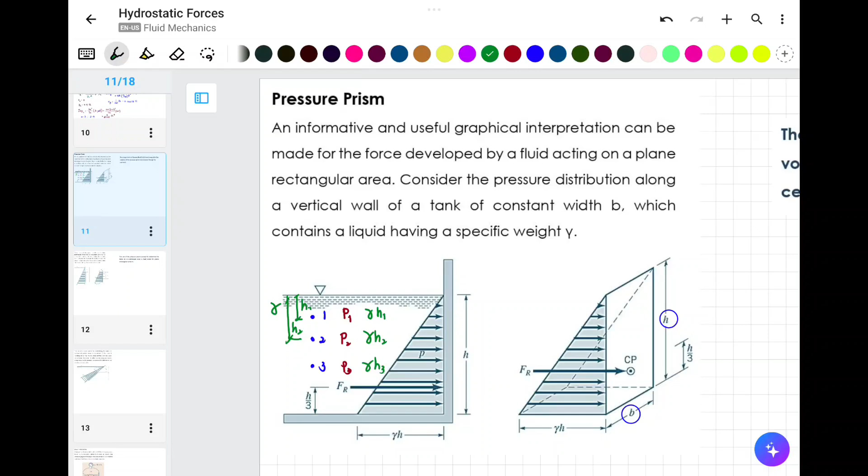So what I'm saying in this illustration is, as our point goes deeper, the pressure increases. In this case, if the specific weight is uniform or constant, then the pressure increases constantly in a linear relationship. You'll notice it forms a triangle. So the lowest point, at a certain height H, has a pressure of gamma H.

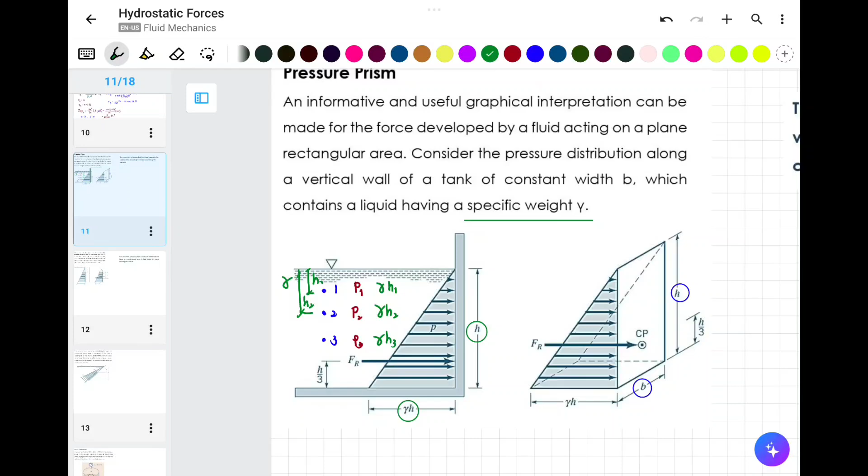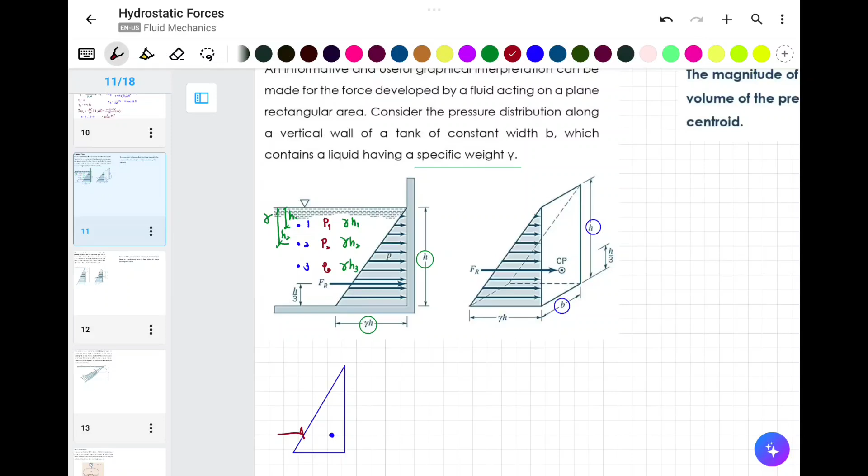Now let's project this onto our rectangular wall, which has an area of base and height. From our statics, or engineering mechanics, if our loading is triangular, we know that the centroid of this loading will act at a certain point. Our force or resultant acts at a height of 1/3.

So it acts at a 1/3 height. Let's say this is it, so 1/3. Let's call this H, so we have a definition. This is B. So 1/3 of the height, that's where our resultant or force acts.

So you see that. In that case, if we want to find the force that acts on the wall, let's see how it becomes. This is our area. We have an area equal to B times H. Therefore, our F sub R, from our discussion earlier, since we have a pressure diagram here.

So for every strip, or every unit length, we have the color here, for every strip of our pressure. So for example, this, every unit, going up and up, until we get our width B. So therefore, this will be equal to the pressure acting times the area, similar to what we discussed earlier.

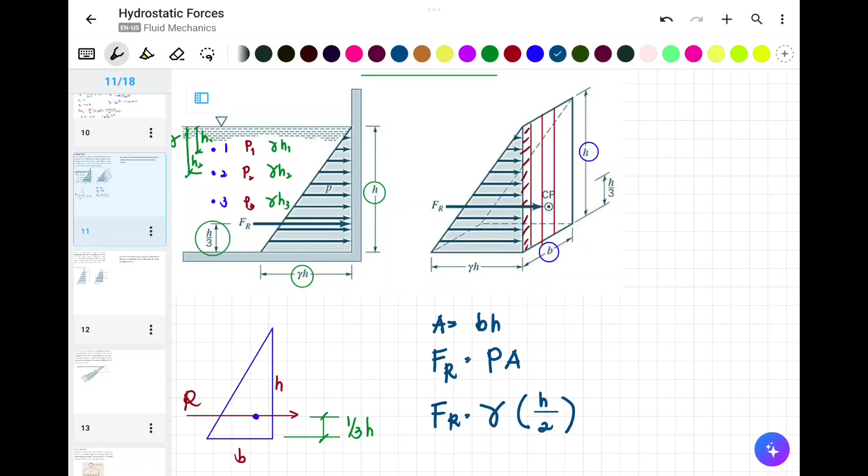At half of our rectangular section. So this will become H over 2 times our area. Since we know that our area is B times H, therefore, simplifying that, gamma multiplied by H over 2, times B times H. So therefore, our force or resultant force is equal to, what happens there, that is 1/2 gamma B H squared.

So there's our area, or should I say force. But if we're going to notice, since we are dealing with a prism, you'll notice that since we are dealing with a prism, when we say prism, what we have in mind is something with width, length, and height. A prism, so we're talking about a three-dimensional object.

When we say prism, meron tayong volume. And that volume, yun yung representation natin ng ating totality na tumatama na force, or should I say pressure distribution. Katulad nito, may volume siya. So meron siyang height, may base, meron siyang width na gamma H.

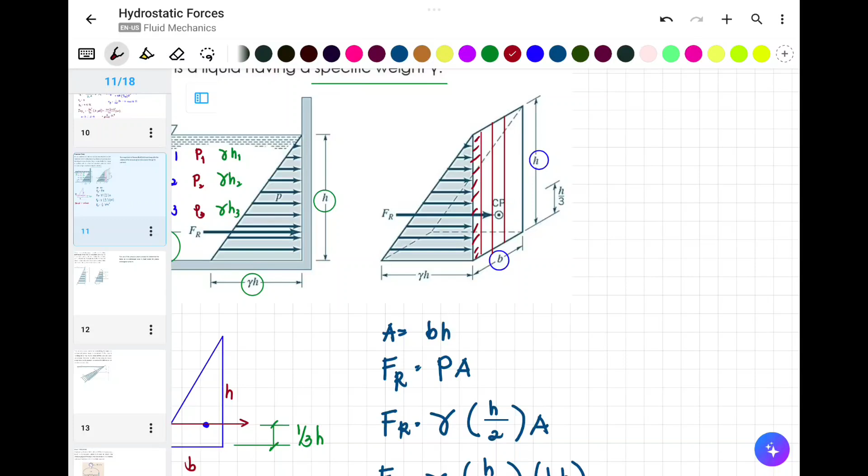Kaya pag kinuha natin etong formula na ito, if we're going to resolve that into a prism, prism approach, pwede natin sabihin that F sub R is equal to yung prism. So that is 1/2, triangle muna. 1/2 that is gamma times H times height na H, times the width na B.

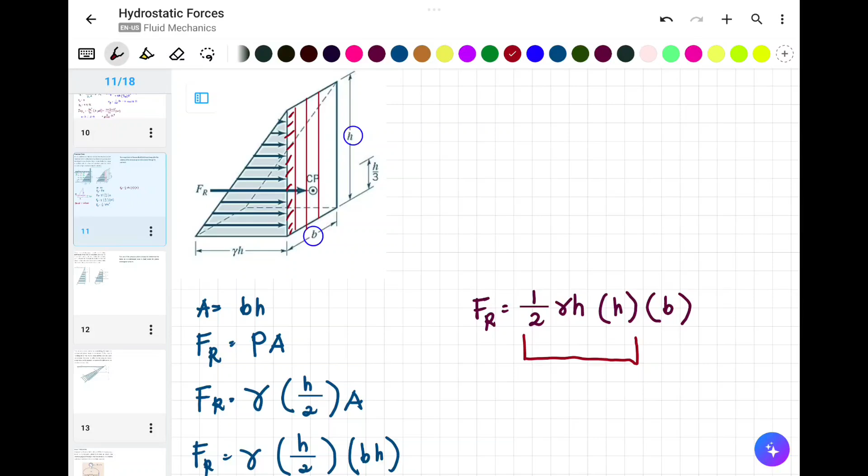So ito yon, kung titignan natin mabuti, ito yung kanyang triangular area. Kasi prism, di ba, so triangular area. So pag say area, para maging volume, kailangan meron kang i-multiply na width. So itong totality na to, this is your volume.

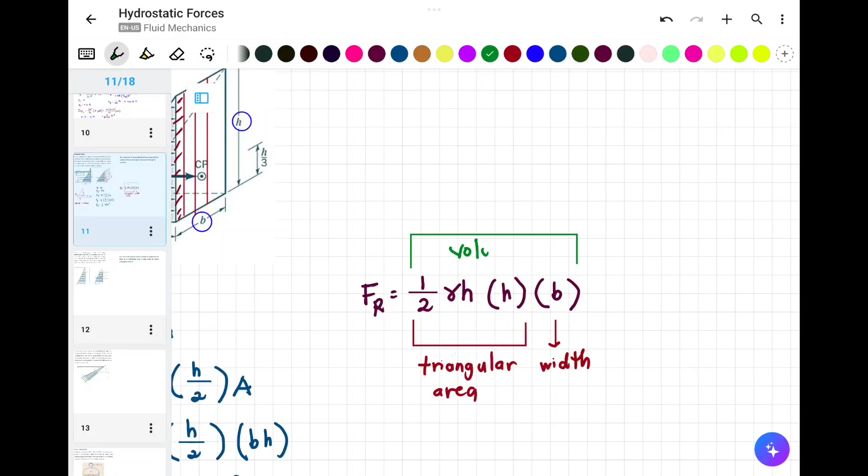This is your volume nung inyong prism. Kaya ang ending, magiging katulad lang din yan nung formula natin. Using yung ating kanina, using yung concept naman natin ng ating pressure from hydrostatic forces na nakasubmerge, that will become 1/2 gamma B H squared.

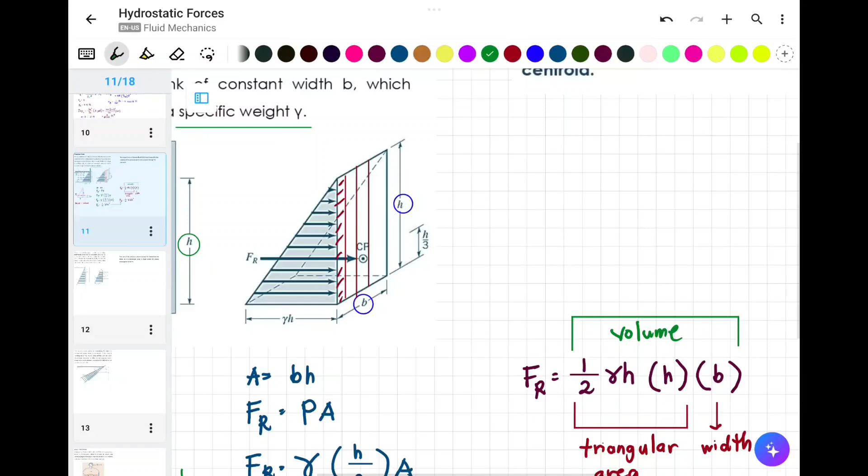Equal lang, parehas na parehas lang yan. Kasi nga ang notion natin is volume. So kaya sabi sa atin dito, the magnitude of the resultant fluid force is equal to the volume of the pressure prism and passes through its centroid. Ito yun, yung pinag-usapan natin. That's the derivation kapag gusto natin gamitan ng triangular prism, yung ating pagkuha ng pressure to a point doon sa ating mga wall or mga nakasubmerged na body.

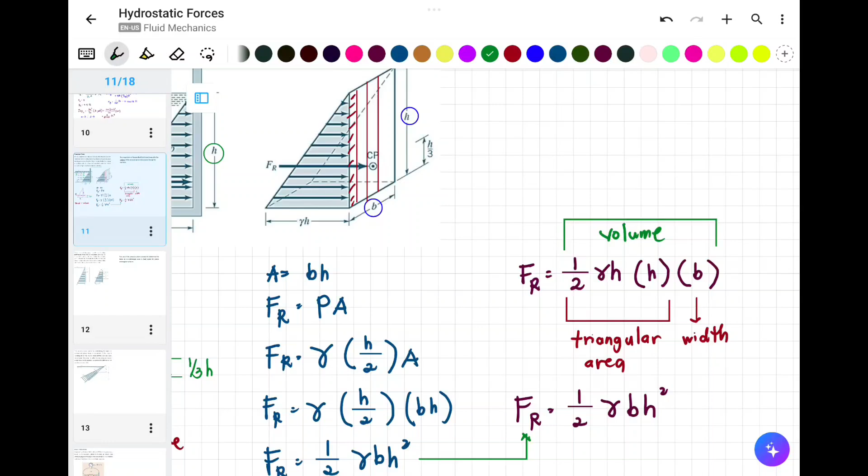Pero alam natin na that force, that force will act saan nga ulit? Sa center of pressure. So this force will still act, it will, this force will pass pa rin through center of pressure.

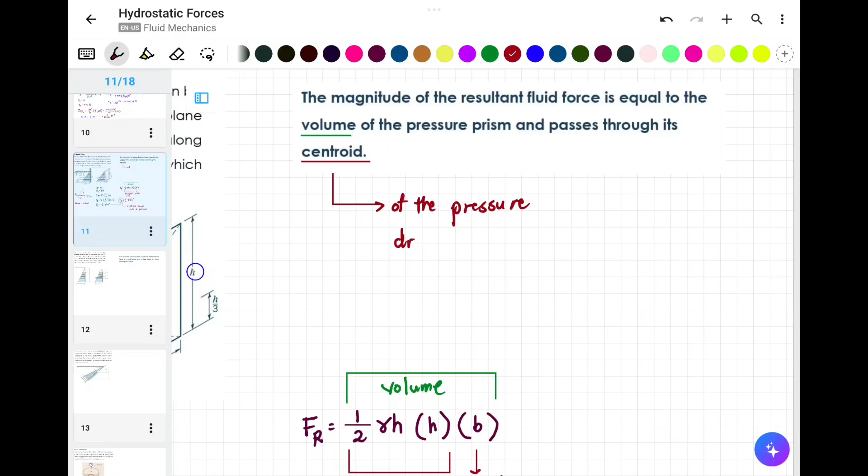So doon pa rin yung tatama. Magpapass sa centroid ng ano? Centroid ng inyong triangular area. Ito yon, yung centroid na sinasabi dito is yung centroid. Baka kasi malito eh, so di ba sabi mo center of pressure? Ito yung centroid of the pressure diagram.

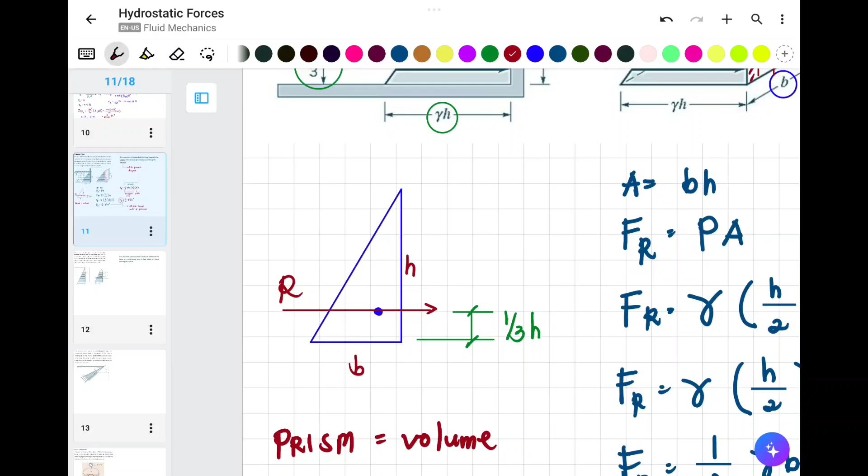So ito yung ating centroid ng pressure diagram wherein, ito siya. Dahil we want to know saan siya tatama, centroid nga siya. Pero kapag pinroject mo na yung inyong body, or wall, into a prism, tatama pa rin siya sa ito. Tumatama pa rin siya sa center of pressure.

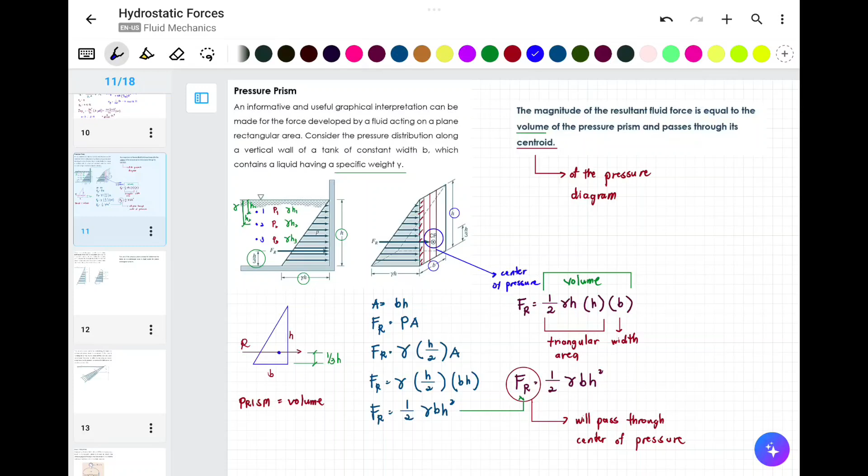Yun yung ating paggamit ng pressure prism. Medyo ginagamitan natin ng concept ng geometry, ng solid mensuration, of our concept kanina yung mga concept ng moments of inertia, centroid, center of gravity, still because we are dealing with figures, prism. So volume is area times a certain height. Ito yon, yung area na yan, yung triangular area times the width, kaya volume.

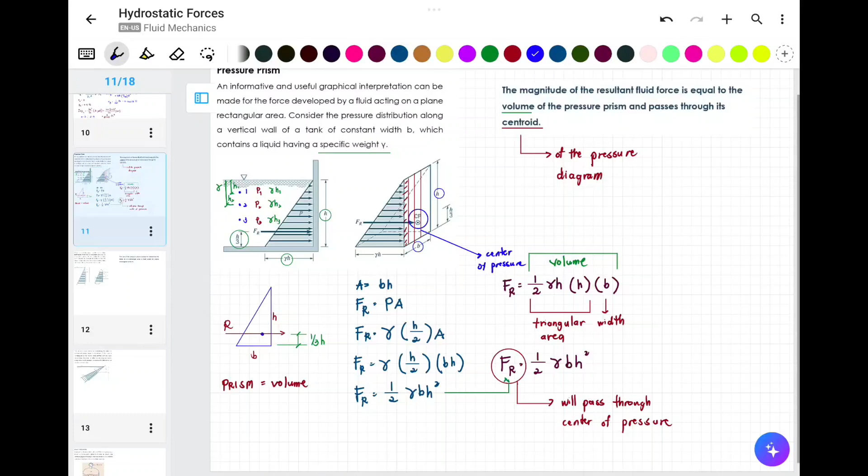Okay, now let's have this one. Sabi dito, the same graphical approach can be used for plane rectangular surfaces that do not extend up to the fluid surface. Ibig sabihin naka-submerge. Unlike kanina, kasi mukhang extended. Ito yon, kaya sinabi niya, ito, extended yung kanyang height. Kaya sagad-sagad, parang total na yung height niya.

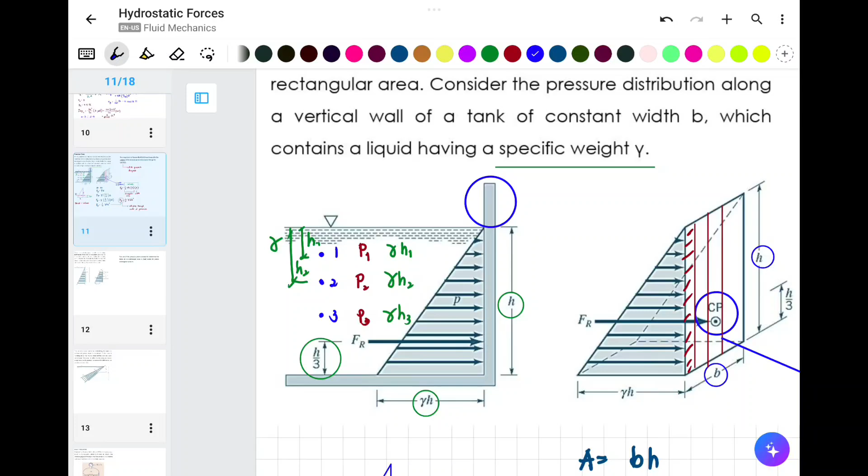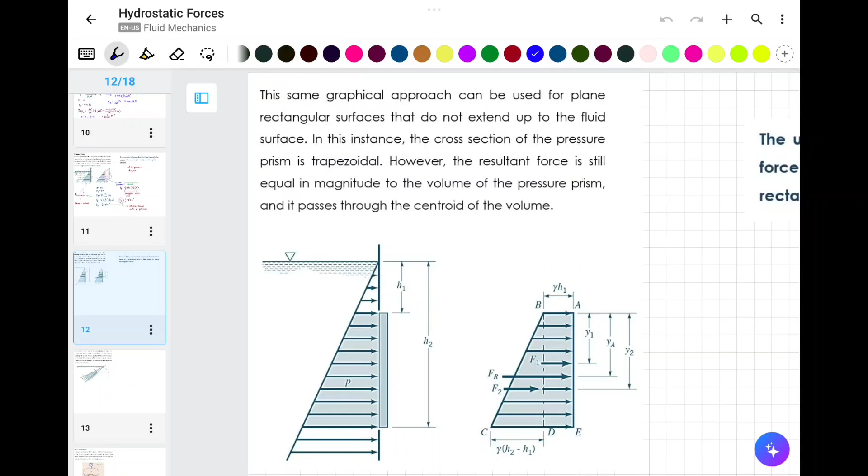So walang factor yung mayroon pang bago umabot dun sa pinakataas ng kanyang section. Walang ganon. So unlike dyan, ito, mukhang hindi ganon ang itsura. Meron pang height, or should I say, meron pang height, no, or nakasubmerge siya to a certain height. So if in this instance, the cross-section of the pressure prism is trapezoidal, which is ito yun.

Yung nakikita nyo, ayan, so trapezoid. Gawa natin ng ano yan, drawing. Ito siya, ayan, so naging trapezoidal. Lagyan natin dito, ayan, so trapezoidal yung ating pressure prism. Yung area, no, the area is trapezoid.

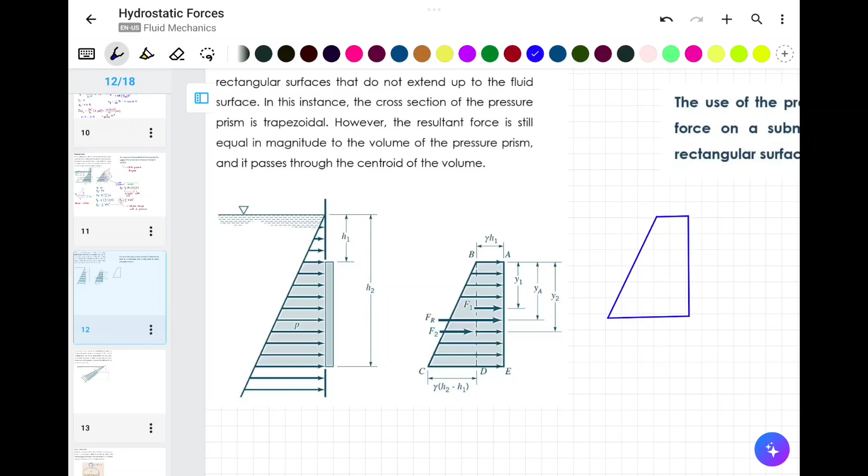However, the resultant force is still equal in magnitude to the volume of the pressure prism and passes through the centroid of the volume. Centroid ng prism na to, o dun sa kanyang respected area. So katulad niyan, kapag trapezoid, kung matatandaan ninyo, meron tayong, ano nga sa trapezoid, meron tayong base of 1. Nipisan lang natin, so we have base of 1, base of 2, ito yung mga dimensions natin.

Natatandaan niyo pa ba? From your mathematics. So ito yung ating base of 1. Tapos, meron tayong height.

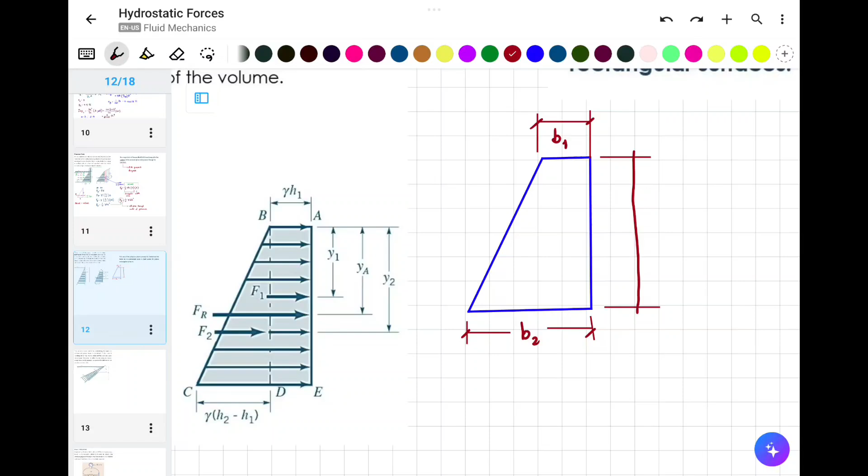Meron tayong height, kaya alam natin na ang area ng trapezoid is 1/2 times base of 1 plus base of 2 times height. O in this case, kung titignan natin, ito yung ating area.

Balik natin dito, meron na tong height. Meron ng existence ng pressure na nandyan, from this free surface papunta sa point na to. Meron na yung pressure, kaya meron siyang gamma h sub 1.

Kapag lumalim ka ulit, as you go to a certain height o certain depth from the free surface, tataas yung pressure na yon. Kung idediretso mo yan, linear pa rin yung kanyang approach kasi yung unit weight ay constant, yung ating property ng fluid, let's say gamma.

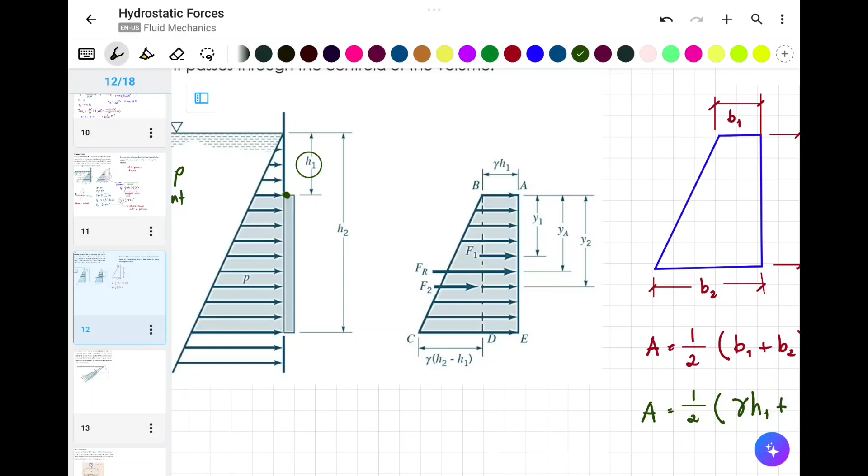Constant yon, kaya linear yung approach, kaso nag-umpisa na siya to a certain gamma h sub 1. Kaya lalabas dito, 1/2 times gamma h sub 1, plus, ito na yon yung buong depth. So if this is your height sub 2, pagdating dito sa point na to, gamma h sub 2 na, plus yung inyong height.

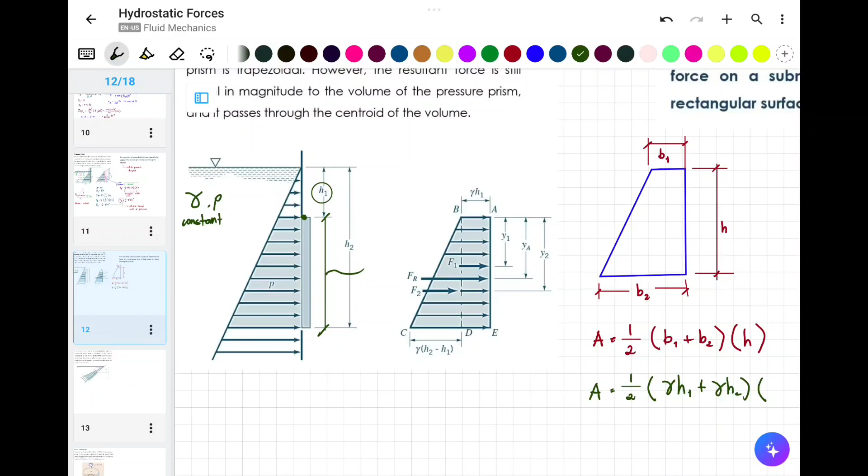Ano yung height na yan? In this case, lalabas, yung height na yan, this height is equal sa h sub 2 minus h sub 1.

Kaya kapag kinuha mo yung kanyang area, yung kanyang projected area, that is 1/2 times gamma, ma-factor out natin. Lalabas to: h sub 1 plus h sub 2, tapos meron ka pang h sub 2 minus h sub 1. Pwede natin gamitin yan.

Ito yung ating area. So if meron ulit siyang prism, o should I say meron ulit siyang base tsaka height, let's say i-project natin dito, meron ulit siyang projection ng prism, na merong base tsaka height. Mangyayari lang is, ito times natin yun.

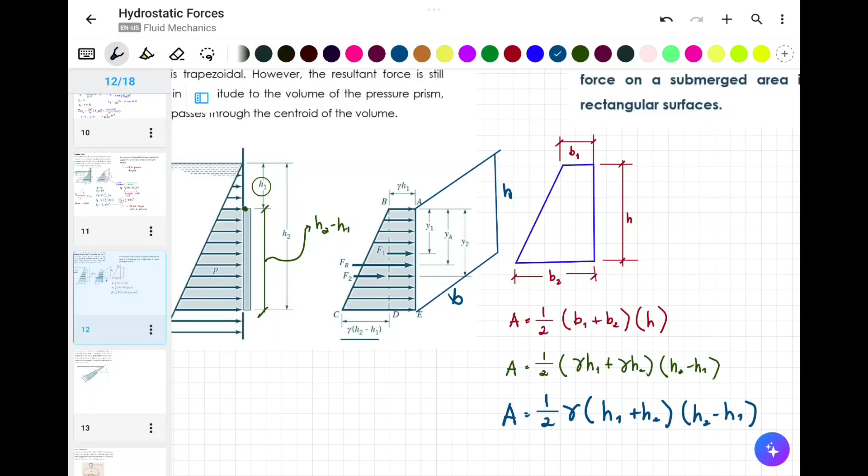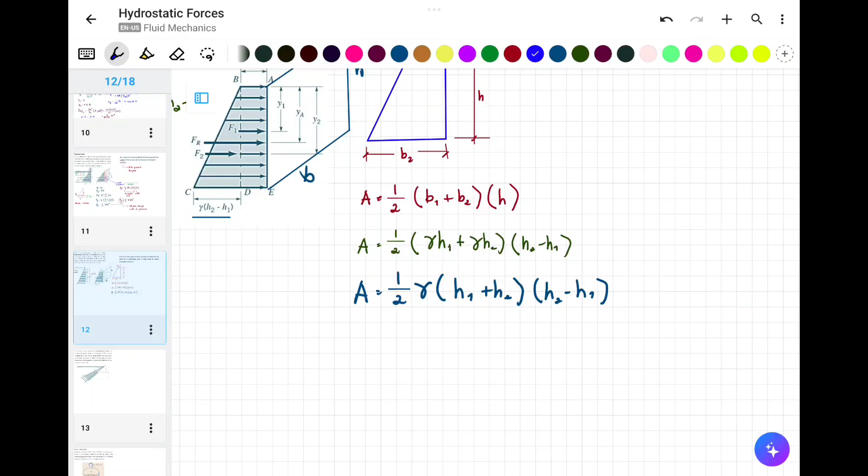Pressure average, parang katulad kanina, so that is pressure average times the area. Ang average pressure, makakompute, gamit yung ating area, dahil trapezoid to hindi natin diretso makakompute, kaya yung ating area na yan magagamit pa rin natin if alam natin yung width. Kapag minultiply na natin yan sa width, itong area na yan ay multiply sa width, magiging force na yan.

That is area times the width. Magiging force na yan, kasi lalabas dyan yung width na yon, kung ano man yung distance, will result to volume, kasi prism nga. So lalabas dyan, F sub R is equal sa, kung diretso natin kukunin, that is 1/2.

Gamma times B. Kung gusto nyo, pwede natin i-simplify further ito, pero pwede naman kahit hindi na: h sub 1 plus h sub 2, multiplied by h sub 2 minus h sub 1. Ayan yung ating resultant force, kung total, if we are dealing with what we call total resultant force.

Ngayon, kung gusto nating malaman yung moment that will cause that body to rotate, kasi nakalubog yan, we will resolve to component forces. Ito na yung nakikita nyo na merong F sub 1 at F sub 2. So from that concept, applying yung ating Varignon's theorem.

Using Varignon's theorem, malalaman natin na let's say ito yung ating resultant, F sub R, na-compute natin. Pwedeng diretso, tapos may component ka. Paano makakompute yung component? Gagawin mo triangle, tulad na ito sa natin, gagawin mo siyang triangle, at yung isa gagawin mo rectangle. Same pa din yung kanilang width.

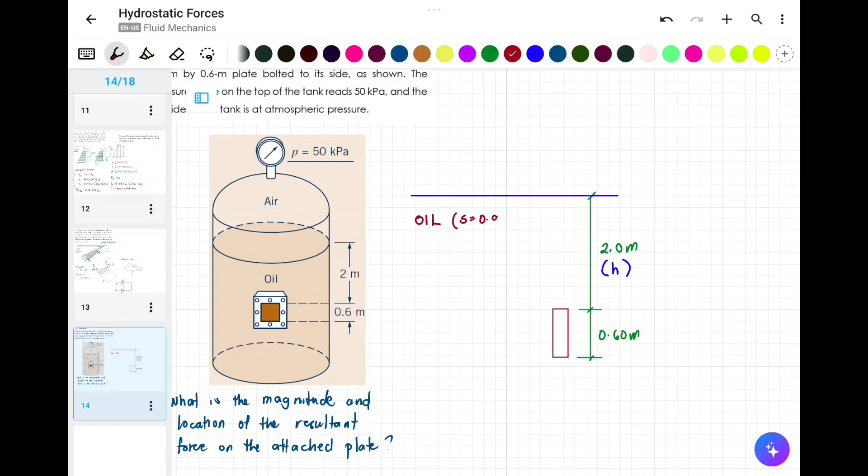Ano sabi sa atin? This is oil daw, na merong specific gravity. Ang specific gravity daw ng oil, this is your oil na merong specific gravity daw na 0.9. So, therefore, para makuha mo yung gamma niyan, times mo sa gamma ng water. Gamma ng oil is equal to specific gravity ng oil, times gamma ng water.

Okay? So, alam naman natin yung standard, diba? 9 point, kung wala naman sinabi at kilopascal to, malamang pwede tayong gumamit ng kilonewton. Okay? So, yun yung madali natin ma-observe dyan. So, therefore, using pressure diagram, kakapalan ko yung drawing dito.

So, ibig sabihin dito, initially, yan. Itong kulay blue na yan. Okay. Meron na ito ay gamma. So, this is gamma times H plus yung existence ng pressure sa taas. Okay? Kasi nga, meron na siyang 50 kilopascal.

Okay? Bago pa siya bumaba. Di ba air yan? Ano sabi ko pag air? Pag air, sabi natin sa previous discussions natin, dahil sobrang gaang ng density ng air, yung pressure na nadidistribute sa kanya, kung closed yung lalagyan, is the same pressure. Okay? Same yung pressure na yon.

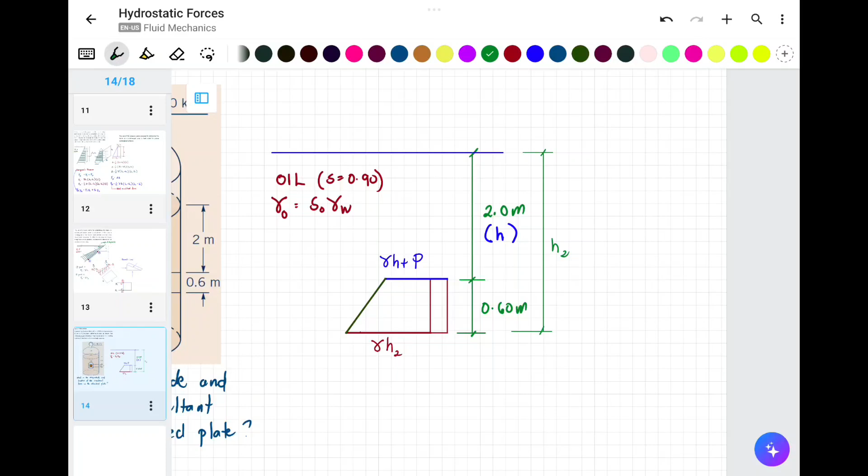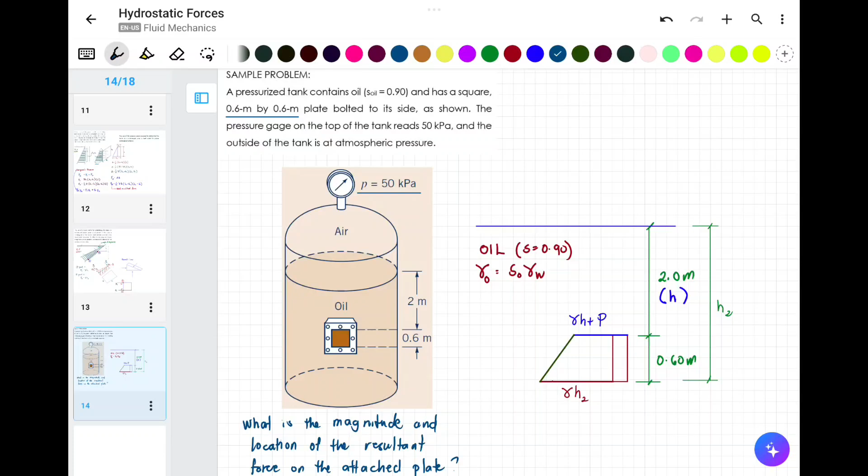Okay? So, ngayon, using pressure diagram, so, kung makikita natin, ano yung area? So, sabi sa atin, the area ng plate, balikan tayo dito. Ang area daw ng plate is 0.6 meter square daw no? By 0.6 meter. So, ano nga ulit yung ginagagamitin natin? Using pressure prism, we will be using F sub R, para makompute daw yun, is using volume.

Kasi prism, na equal sa area, projected area ng pressure diagram, PD, times the width. Okay. In this case, ano ang area ng pressure diagram? So, pwede tayong gumamit ng approach ng trapezoid, or pwede rin naman gumamit ng approach ng triangle and rectangle. Either of the two approaches ay tama. Okay? Yun nga lang, mahirap sa ating makuha yung magiging location kapag hindi natin inisa-isa.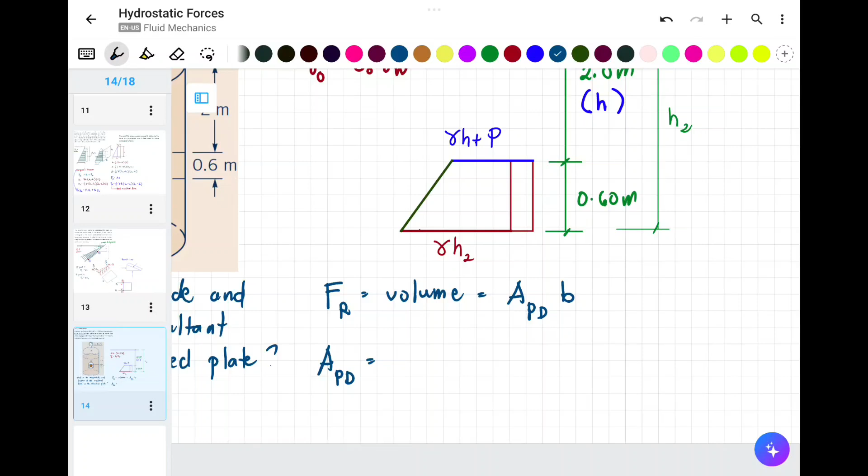Okay? Dahil kailangan natin ng F sub 1 at F sub 2. In this case, pag hinati natin yan, so ito, meron tayo ditong F sub 1 na nag-aak. Alam natin saan nga ito nag-aak? Sa centroid ng triangle. At F sub 2, ito na lang, yan, na nag-aak sa centroid ng rectangle. Okay? So, yan yung centroid na sinasabi.

No? So, pwede tayong kumuha ng area na area ng triangle plus area ng rectangle. Okay? So, in this case, ano itong magiging itong sukat na to? Kung ito yung ating rectangle, ay triangle rather. So, ito ay this length or width is equal to, so, pwede mangyari kung ito ay may pressure na sa taas, no? Meron na. Ayan. So, pwedeng madagdag dito. Let's say, mula dito sa height na to, let's say hanggang dito is yung ating pressure. Tapos ito yung gamma H.

Diba? Pwede natin sabihin ganun no? Ito yung ating, na ano ba siya? Na-visualize. Usod natin to. So, pwede natin sabihin kasi na ito yung ating gamma H. Yan. Ito yung ating P, or existence ng pressure. Therefore, ito ay pwede sabihin na gamma multiplied by H sub 2, minus H sub 1. O, yan yung pressure na yan, doon sa triangle na yan.

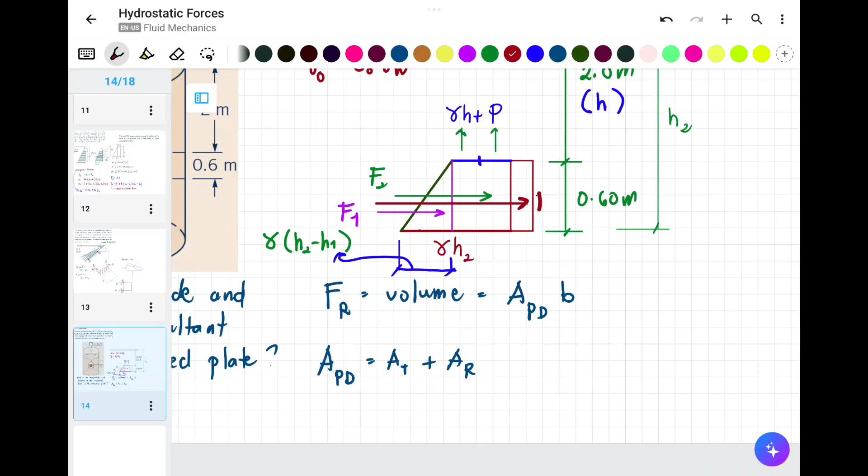Baka dyan tumama. Okay? So, ngayon, isa-isahin natin. No? Sige. O, dito na lang sa bandang taas. Yan. So, unahin muna natin, computin yung for the triangle. Okay? For the triangle. Sabihin yung force doon. Okay? Sa triangle na yon. So,

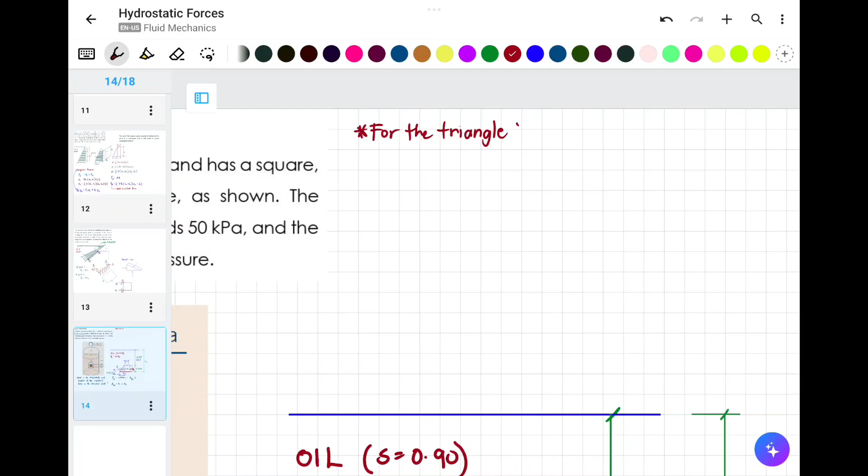Yan. So, tingnan natin dito. So, meron tayong height na 0.6. Meron din tayong height na, ano yun?

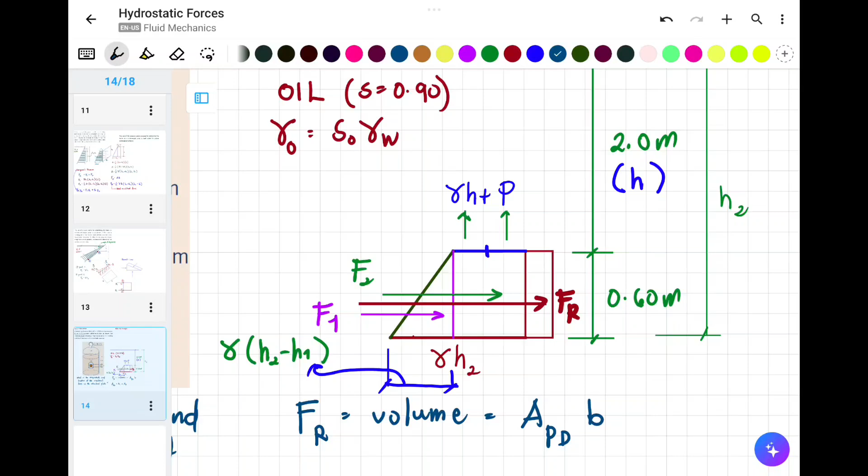Meron din tayong height or width, yung height niya, base niya is gamma times h sub 2 minus h sub 1, tapos meron pa tayong height na 0.6. So, therefore, for the area ng triangle, that is 1/2 multiply natin ng base. Ano yung base natin? That is gamma, h sub 2 minus h sub 1, times yung ating height na 0.6 meters. Dahil defined naman sa atin yung mga height.

Paano ba yung h sub 1? Ano ba yung h sub 1 na tinutukoy dito? Ano yung h sub 2? Yung h sub 1 natin, yung ating h, this is your h sub 1. At ito yung ating h sub 2, which is equal sa 2.6 meters.

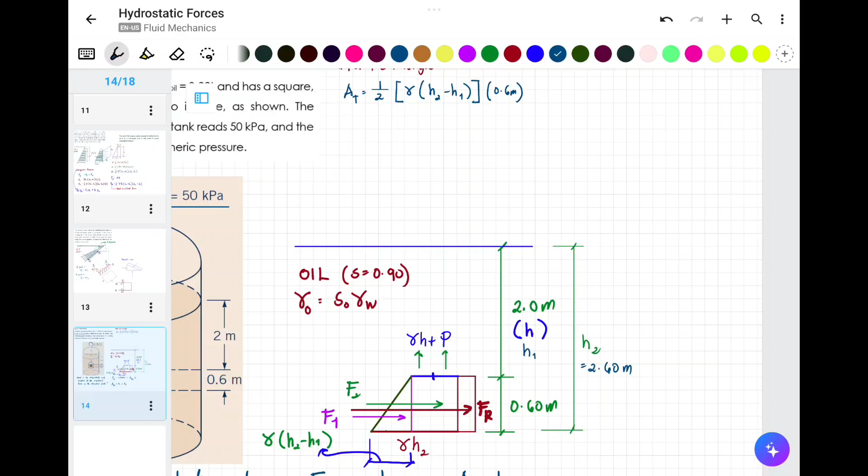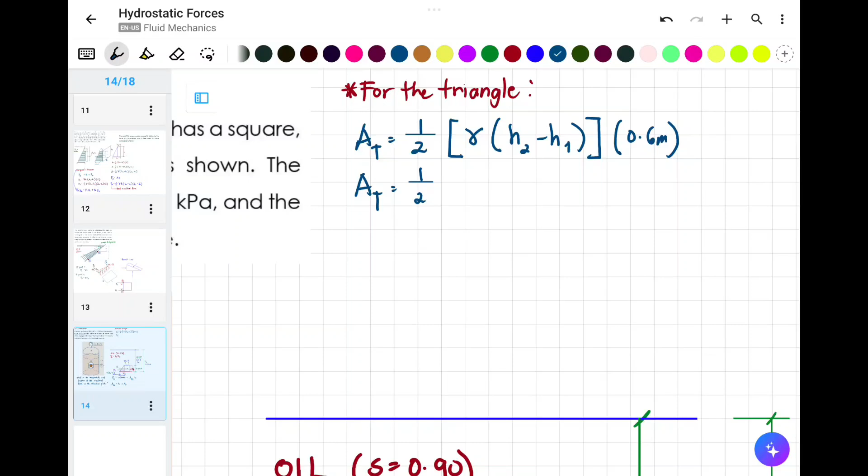So madali na, no? Kaya nga alam natin na yung 0.6 yun yung difference. So pag inoperate natin to is triangle, 1/2 multiplied by gamma, which is specific gravity ng oil times gamma ng water, that is 0.9 times 9.81 kilonewton per cubic meter multiplied by 0.6 meter multiplied by 0.6 meters. So lalabas na sagot sa atin dito kung kilonewton ito.

Area pa lang to, ito yung ating area. Ngayon, ano naman yung ating width? So yung width natin, yung B, hindi ko muna i-operate yan. Yung ating width ay, sabi sa atin, since square, so that is 0.6 meters din.

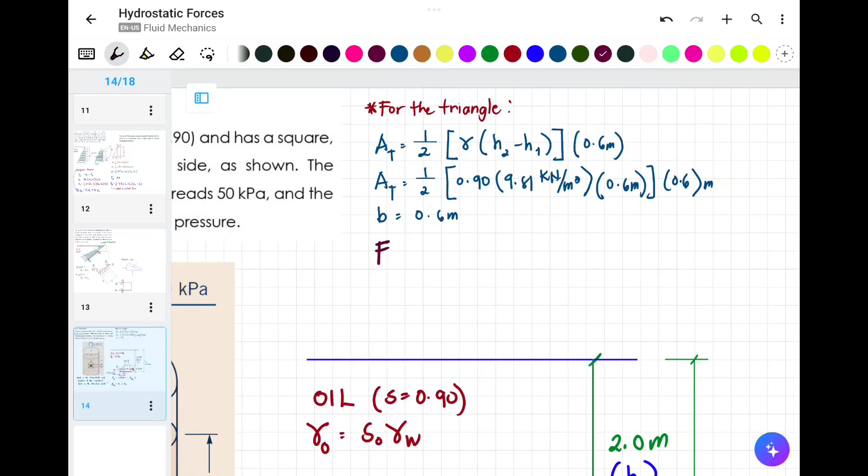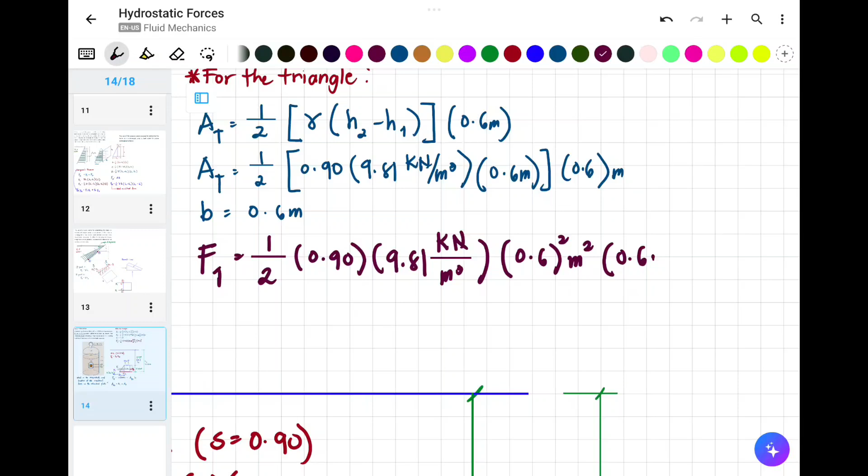So 0.6 meters. So for the force, ito na. So for the resultant force ng triangle or F sub 1, that is equal to 1/2, buuin na natin dito, times 0.9 times 9.81 kilonewton per cubic meter, times 0.6 squared, square meter na to, times 0.6 meter. Ngayon, ang resulting unit nito, since makakancel yung mga meter, is kilonewton. So in this case, lalabas to as 0.954 kilonewton. Ayan yung ating F sub 1 para sa triangle.

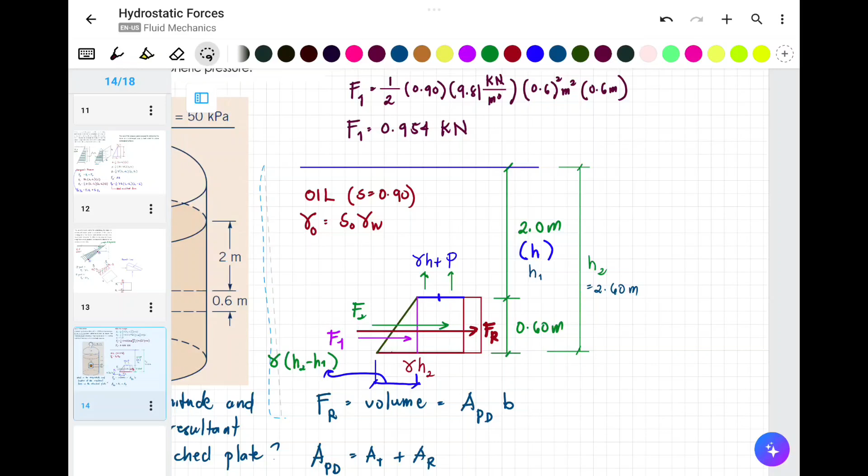Nakikita ba yun? Okay, ayan yung ating F sub 1. Ngayon, ano naman yung F sub 2? Sige, dito tayo sa next page, pero dali natin to. Next page, so for F sub 2.

Nakapitan natin yung F sub 1, diba? So for F sub 2, rectangle naman ito ngayon. Madali lang, kasi sa rectangle, basta alam natin yung area, ganun ulit. So ngayon, let's compute naman for the rectangle.

Ito kanina for the triangle, no? So now let's compute for the rectangle. Para sa rectangle naman, okay? So sabi natin, yung area naman ng rectangle is equal to base times height.

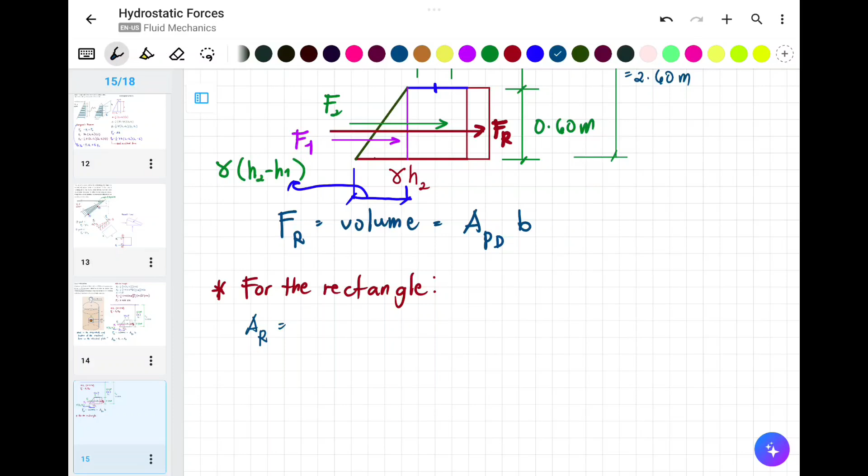Ano yung base niya? So that is gamma H plus the presence ng ating pressure. Sabi natin, 50 kilopascal na yon from the problem, ayan yung ating illustration. So then multiplied by the width. Ano yung width niya? 0.6 meters. Sorry, height, so width times height.

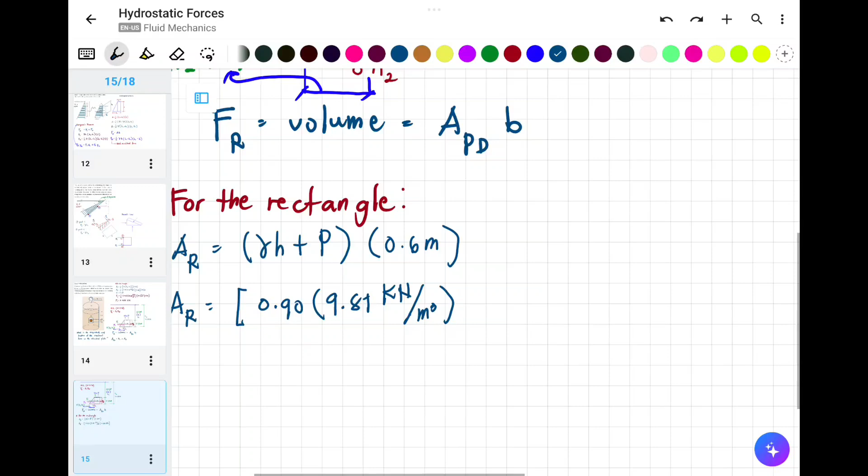So this is area ng rectangle, that is 0.9 times 9.81 kilonewton per cubic meter plus 50 kilopascal or kilonewton per square meter, which is parehas naman ng kalalabasan. Ay, kulang pa pala to, plus multiply natin sa height. Ano yung height na yon? Yung height na yon is yung ating 2.0 meters, plus 50 kilopascal or kilonewton per square meter.

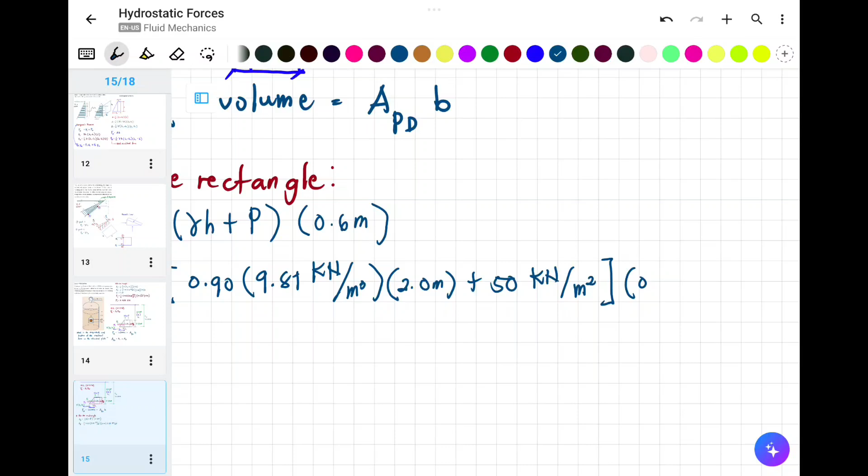Multiplied by 0.6 meter. So ito ay area pa lang. Yung width natin or yung base natin dyan, para maging volume, is 0.6 meter pa din. Katulad kayo na sa triangle, so for us to compute for the F sub 2, compute na natin yung F sub 2.

F sub 2 is equal to area times the width. So this will become, pag simplify natin, 0.9 times 9.81 times 2, that is 17.658, okay, plus 50, take note this is kilonewton per square meter, times 0.6 meter times 0.6 meter. Multiply lang natin yan, yung na-compute natin.

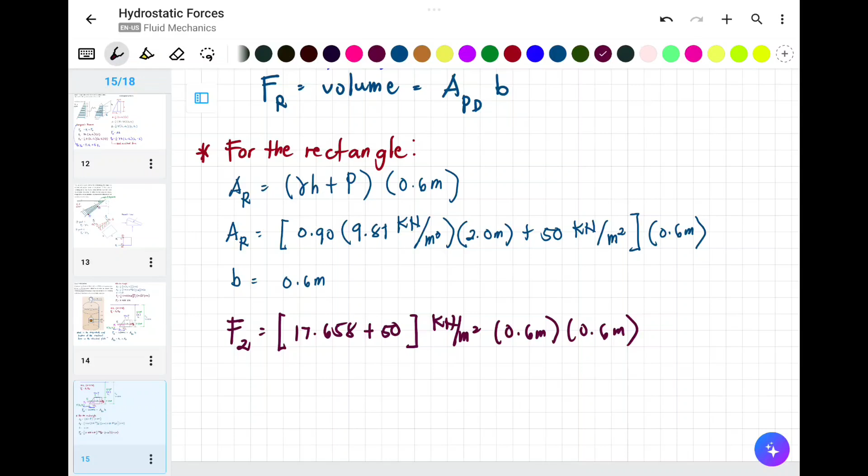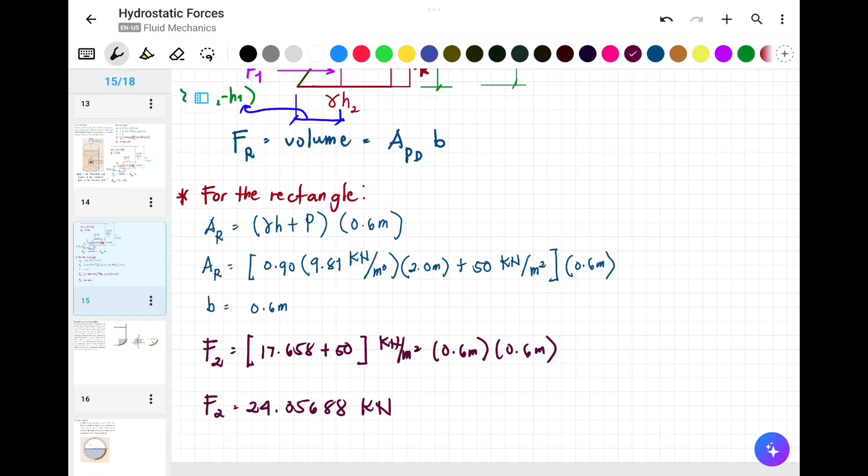Ayan, so pag kinompute na natin yan, lalabas medyo mahaba-haba yung decimal places niya, 24.35688 kilo Newton. Yan ang F sub 2 natin. F sub 2 pa lang yan.

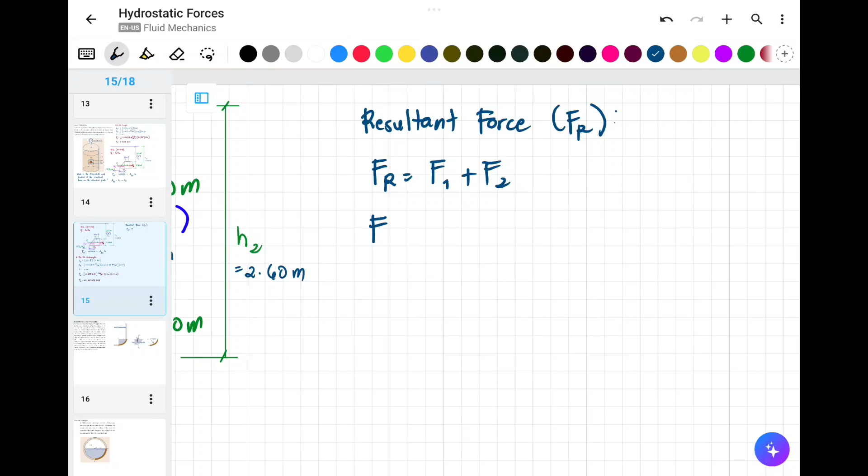So check na tayo ngayon, para makompute natin yung magnitude ng resultant force, F sub R. So F sub R is equal to F sub 1 plus F sub 2. Therefore, F sub R is equal to, anong ulit yung una natin kinompute?

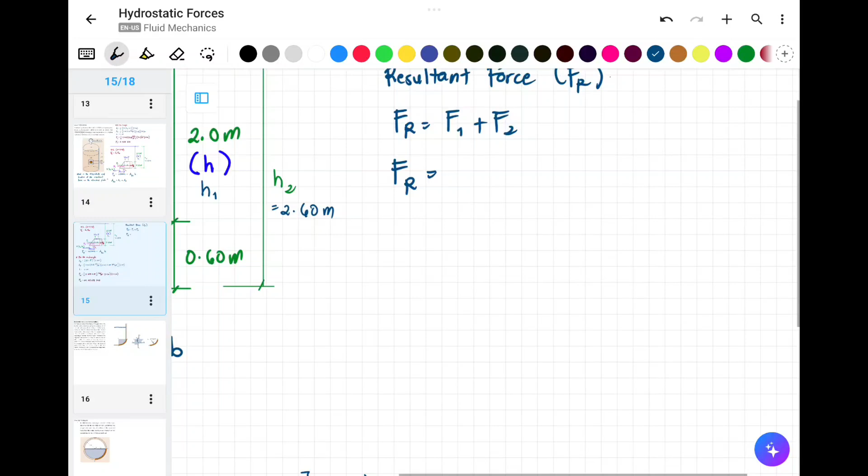0.954 kilonewton. So this is 0.954 kilonewton plus, anong ulit ito? 24, yan, 0.05688. So plus 24.05688 kilonewton.

So ating F sub R is equal to yan, 25 point something. 25.01. Parang ganun ba lalabas yan? 25.01088 kilo Newton. Okay, so yan yung ating resultant force. Meron na, check. Na-solve na natin ang resultant force.

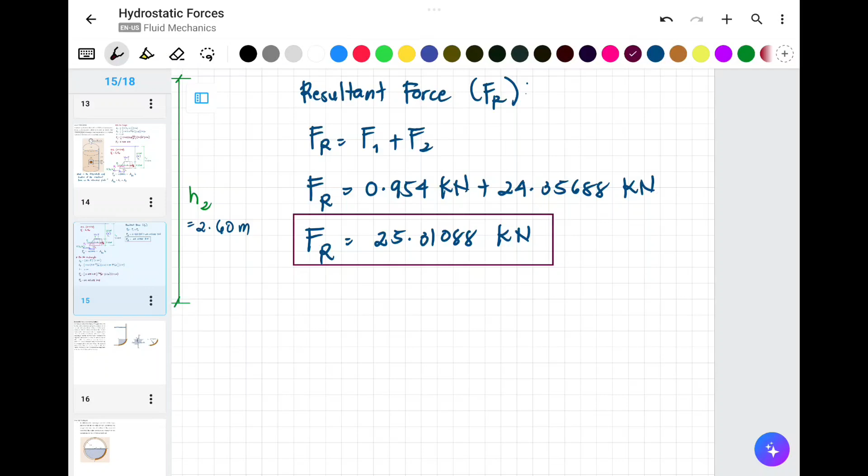Ngayon, tanong na lang sa atin, ano daw yung kanyang location? So yung location na tinutukoy natin, syempre kung tayo ay nag-analyze ng problem na ganito, yung location natin dito na gustong tukuyin ay with respect syempre dun sa takip. Kasi bakit? Dahil alam natin kapag tumaas yung pressure dyan, pwedeng mabuksan yung takip, sasabog, parang gano'n, yung term na ginagamit natin, or pwedeng pumutok, mabutas.

So kailangan alam natin ano yung location niya mula sa takip. Kasi yun namang liquid oil, with certain air pressure, pwede mag-vary yan kung lalagyan na yan ng liquid. Ngayon wala namang binigay din na height ng tank. Okay sana kung may height yung tank, siguro from the height of the tank.

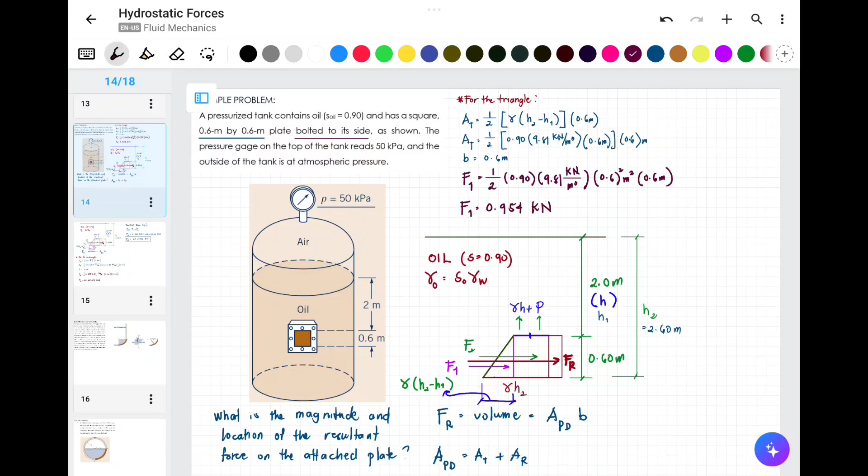Pero ang best kasi bolted, take note, ang ginamit na term sa atin ay bolted siya to its sides. Therefore kailangan alam natin ano yung kanyang location from the bolted na side, which is in this case yung pinaka parang dulo niya, yung pinaka parang kung saan yung kanyang bago mag-bolt. Kasi doon matibay doon, so baka doon sa portion na naka-welding lang yung ating plate. So lalabas, hahanapin natin yung kanyang location from the pinakataas, sa point na to.

Let's consider this as point O. Yan, so yun yung ating, or let's say dito sa baba, pwede rin dito, let's say point M naman to, o P pala, P, yan, point P. Either of the two, pwede natin ma-compute, pwede natin i-compute pala rather. So walang problema doon sa portion na yon, kasi napakadali lang naman, madali natin makakompute yan.

Let's say may dalawa tayong way to compute. Una, if we want to compute it, pwede tayo magkaroon ng dalawang approach. Location, yan. Pwede from point O, or pwede rin from point P. Let's say from point O yung ating i-compute.

So location from point O, so lalabas dito is, using Varignon's theorem, F sub R times kung ano naman yung distance na sa point O, let's say i-dictate natin siya as Y sub R, plus equal, yan, kasi Varignon's theorem, F sub 1 Y sub 1 plus F sub 2 Y sub 2. Anong ulit yung Y sub 1 natin? Yung triangular. So meron tayong F sub R dito, that is 25. Yan, 0.01088 multiplied by Y sub R, idadrop ko muna yung unit kasi alam ko naman lahat yun naka-kilonewton.

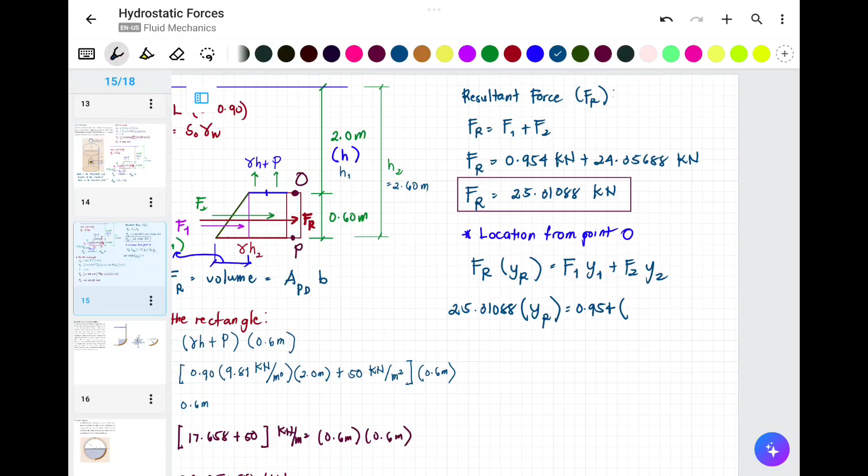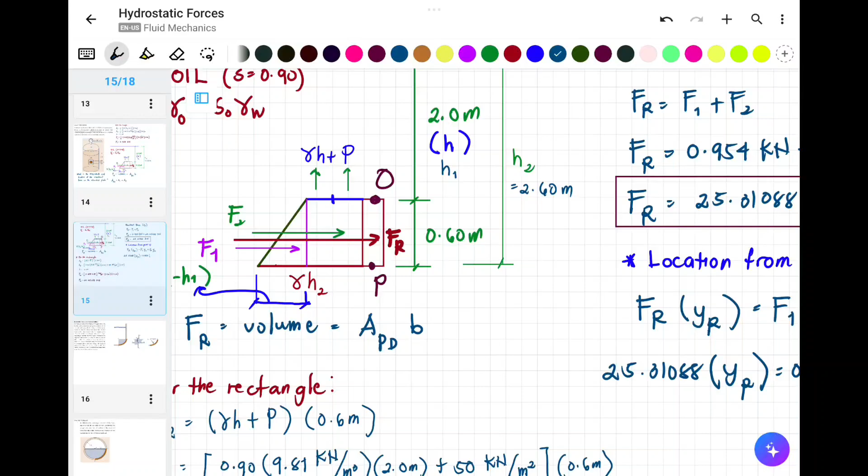So F sub 1 natin is 0.954. So ano yung kanyang Y sub 1? Since triangular to, from point O, sa taas, 2/3, ito, sa baba, 1/3. Eh, kung nasa taas yung point O, 2/3 ng 0.6, so that is 0.4, diba? 0.4, yan, meters.

Okay, then plus, dito na lang siguro. F sub 2 natin is yung rectangle, so that is 24.05688, multiplied by, so kalahati ng 0.6, 0.3 meters. So malalaman na natin yung location, yung Y sub R niya, with respect to point O.

So either of the two, pares na naman yun, so magiging specific lang dapat yung tanong. Halimbawa, ano bang point? From the top ba ng inyong takip or from the bottom ng inyong takip?

So yung answer natin is nasa 0, yan, kasi mula sa taas no, 0.303 yan, 76, mahaba-haba yan, 91 meters. Yan, so kung mula sa baba, pwede nyo na lang i-check, kayo na lang, mag-check niyo kung dapat, pag minus nyo ito sa 0.6, yun dapat na maging sagot. So nasa ano yan, 0.2 something, parang ganun lalabas, 0.296 or 297, ganun.

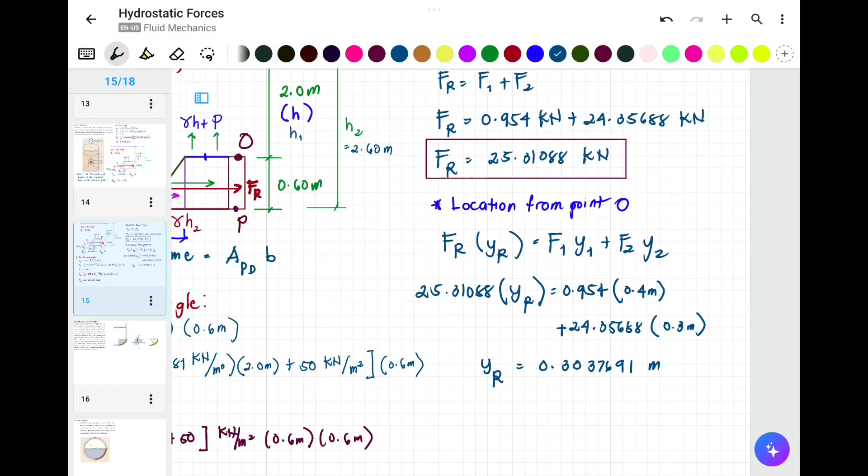So dahil almost parehas sila or almost equal, bandang ano siya, hindi siya kumalahati, pero nandun na kasi 0.3, diba? So ganun ang magiging sagot. So therefore, ito yung ating location niya from point O.

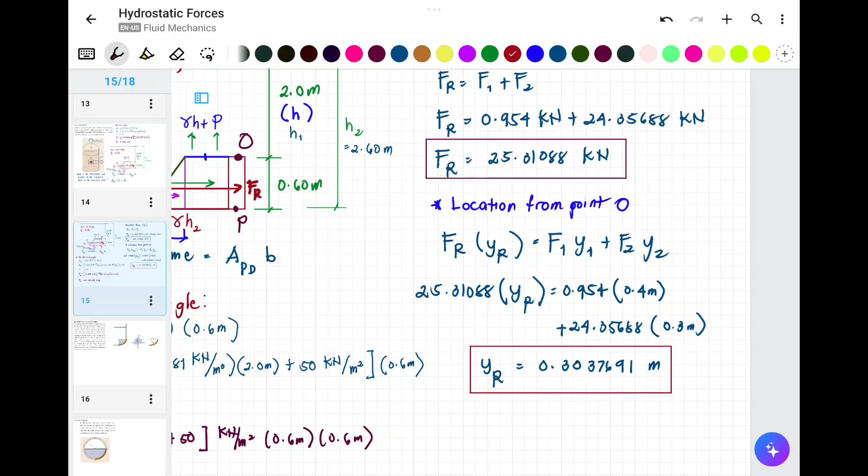Ngayon, kapag tinanong from point P, yun nasa baba, edi gamitan niyo ulit ang Varignon's theorem din. Papalitan lang ninyo yung kanyang centroid ng mga yung y sub 1 and y sub 2. So that's it for the discussion natin ng pressure prism.